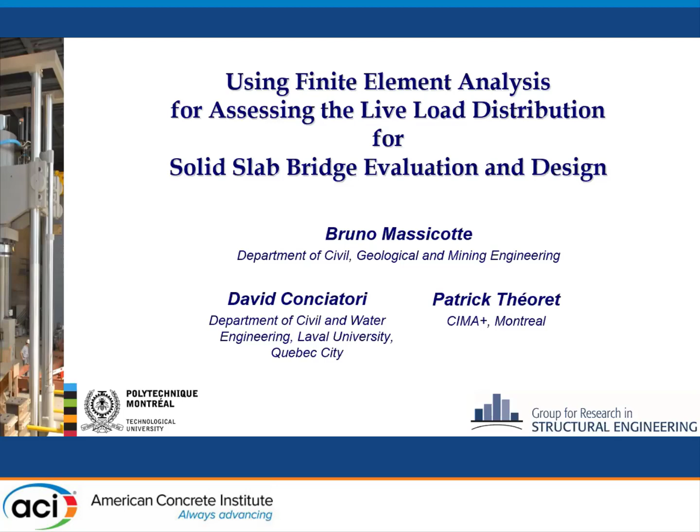The work I'm going to present was done by two people on a project that ended a couple of years ago. They were at Polytechnique at that time, but now they are: a contributing professor at Laval University in Quebec City, and Patrick Théoret, a bridge engineer for a consulting firm in Montreal.

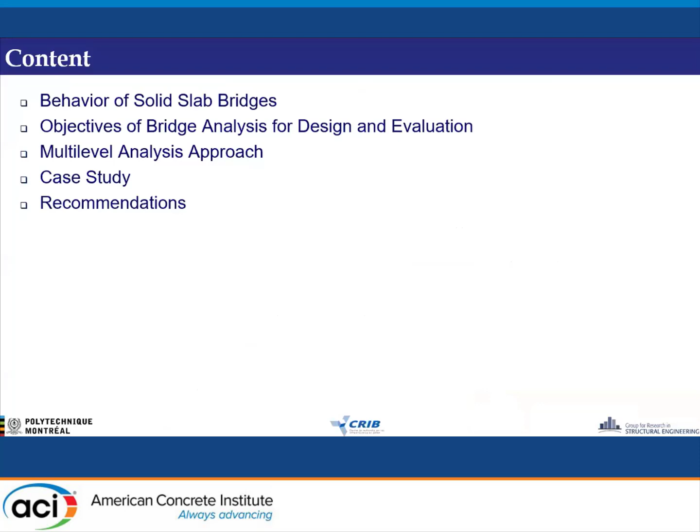So the presentation will talk about the behavior of solid slab bridges and present the objective of bridge analysis for design and evaluation. I will introduce and discuss the multi-level analysis approach, show a case study, and conclude with some recommendations.

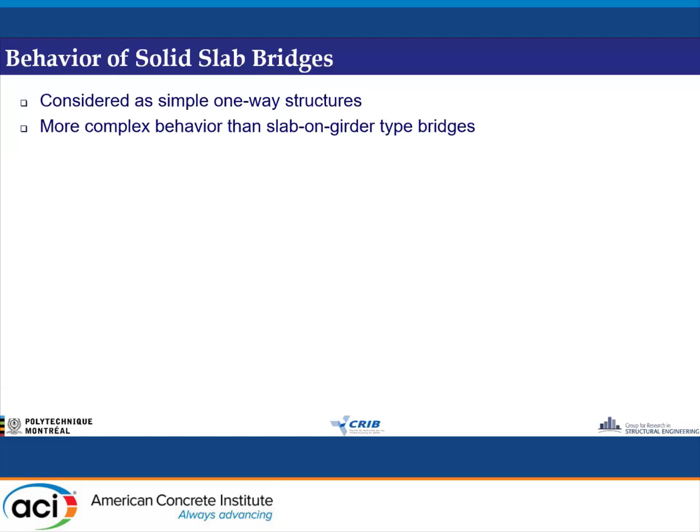Solid slabs are usually considered very simple structures for design and evaluation, and it seems that since the structure looks simple, its behavior should be as simple. Actually, it's more complex than, for example, slab on girder bridges. When I say slab bridges, although everything I'm going to present will be on slabs supported on bearings, the conclusions also apply to slab type frame structures.

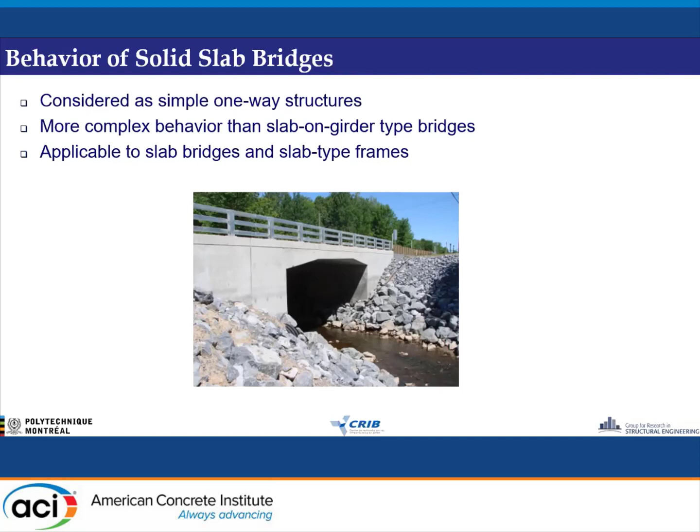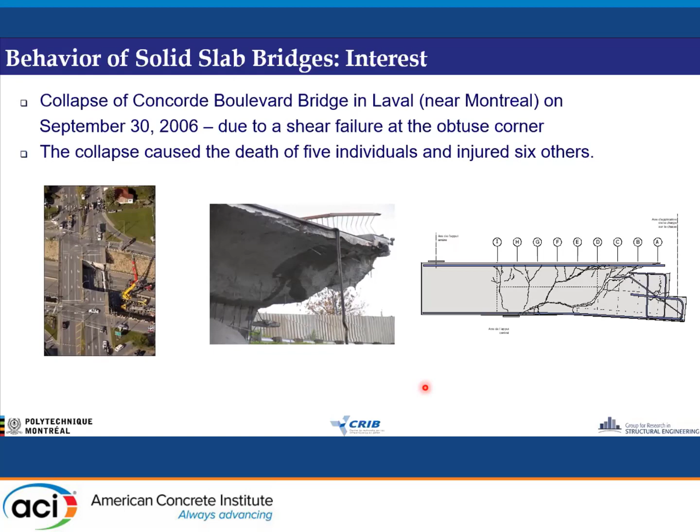An example is shown here. My interest actually came following the collapse of a bridge near Montreal 15 years ago, due to shear failure at the obtuse corner, originating at this point shown in the picture. That collapse caused the death of 5 people and injured 6 others.

Following that, I was in charge for the Quebec Ministry of Transports of finding the causes of that collapse. Since many of those bridges are on the road network, we had several research projects, some experimental, others analytical, on the behavior of solid slab bridges, and 4 of those were tested to collapse with the objective of having a shear failure.

Although it's not part of this presentation, I would say that slab type bridges are quite redundant structures at ultimate.

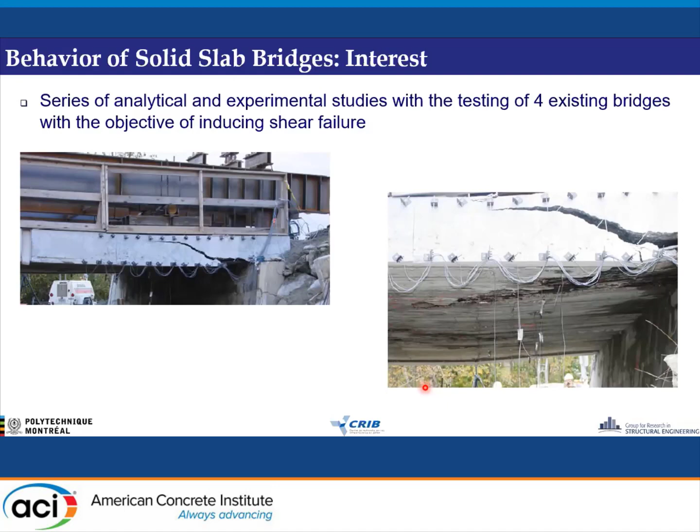Nevertheless, why am I saying the behavior is complex? If we look at this very simple slab type bridge, 12 meters wide, 10 meters in span, and half a meter deep section.

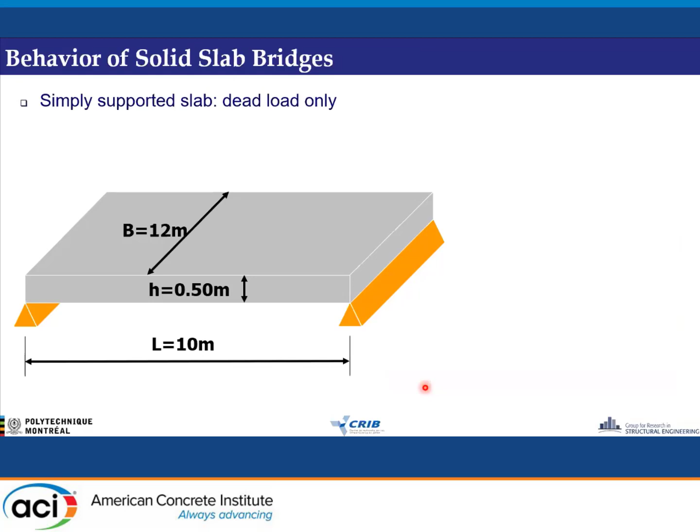If we look at the dead load only, we see there is a non-uniform support reaction. Although sometimes we assume a uniform support reaction for dead load, actually there are some corner effects, and these corner effects are real.

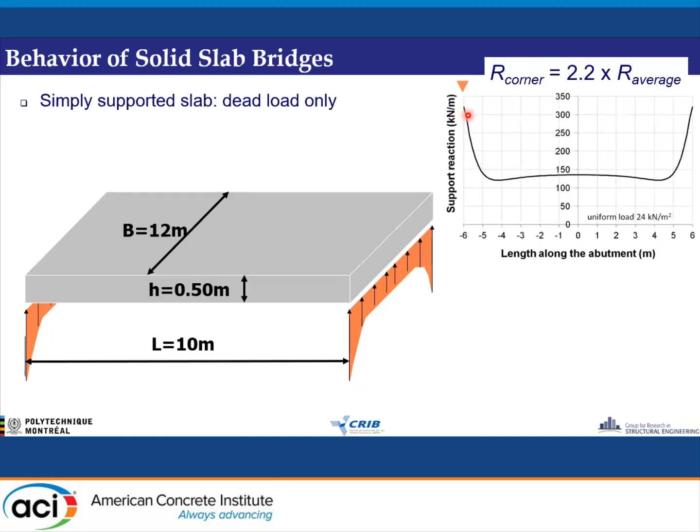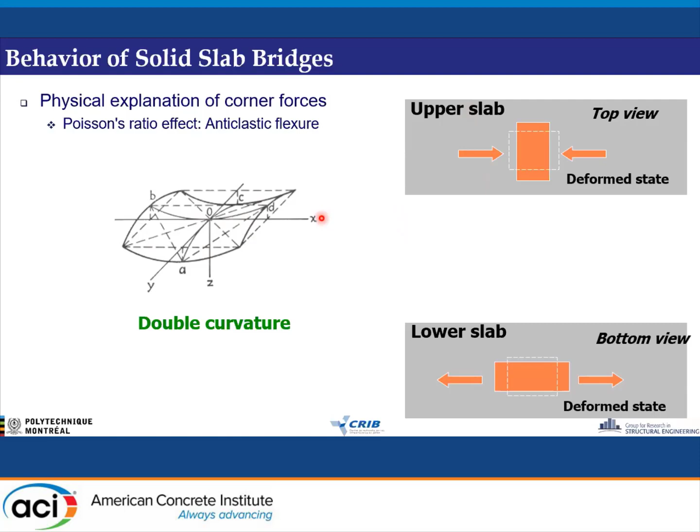Very often it's neglected, and the cause of this corner effect is due to what is called anticlastic flexure, or double curvature in the bridge deck, which tends to load the curvature in the other direction due to the Poisson's ratio, increasing the load near the corners.

That was for a straight bridge. If I have a skewed geometry, say a 30 degree skewed bridge, the effect is much higher. You get a peak load at the obtuse corner here.

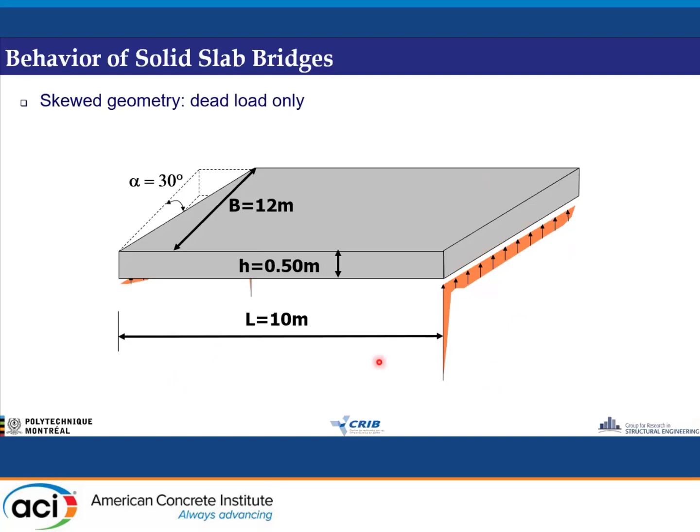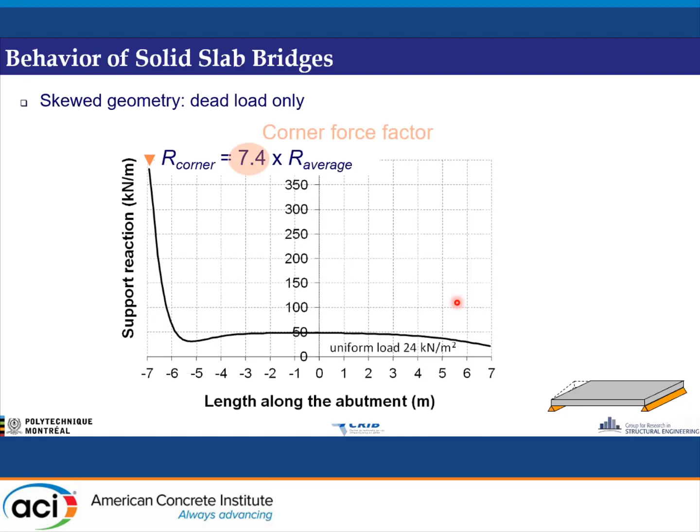If we look at the magnitude of that, for the 30 degree skew bridge shown here, there's a magnification of more than 7 times the average shear effect, and that's only under dead load.

So how can we show that? Actually, there are 2 effects: the Poisson's ratio effect, due to the anticlastic or double curvature mentioned before, which for a zero degree skew angle can double the reaction. However, due to the skew angle, there's a magnification that can go to a very high value—for example, at 45 degrees, the value can go around 10 times the average.

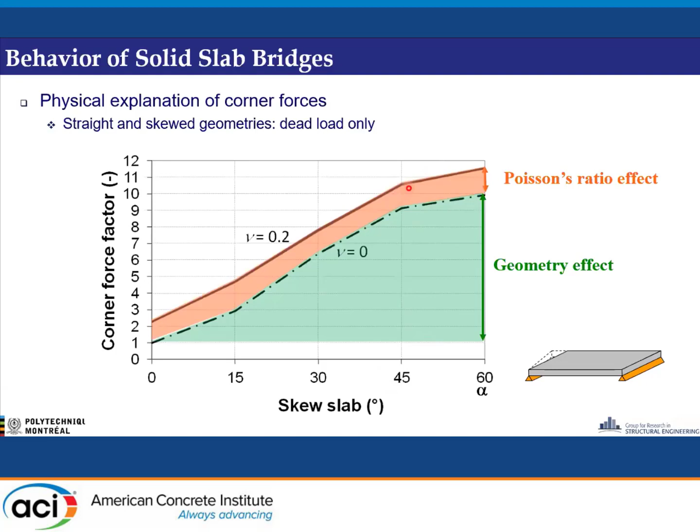The corner effect can be up to 10 times the average value.

And it was, in fact, measured. This is a test done in 1987, so more than 30 years ago, by Morrison and Weisch. In their test, they had a 45 degree skew angle, and they measured the reaction here. We can see that in service condition, shown in red, it's at the obtuse corner.

The ratio is about 10, just a rough value. This increase in shear near the obtuse corner lasts until we get nonlinear behavior, whereas the reaction at this point stops increasing, and the reaction on the other side and across the width starts to increase as well.

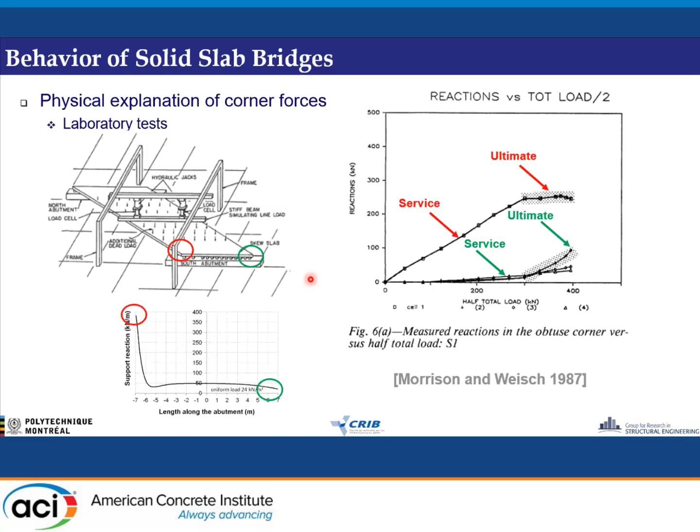So it was really measured experimentally, and it's not just due to the model. Some people say, 'Oh, it's a problem in the modeling.'

No, it's real. So if we're talking about live load distribution in bridge analysis, there are several types of concerns for bridge design and bridge evaluation. In the past, safety was the main issue, cost was second, and service condition came third. Nowadays, safety, service, and cost are usually the new trend in bridge construction and rehabilitation.

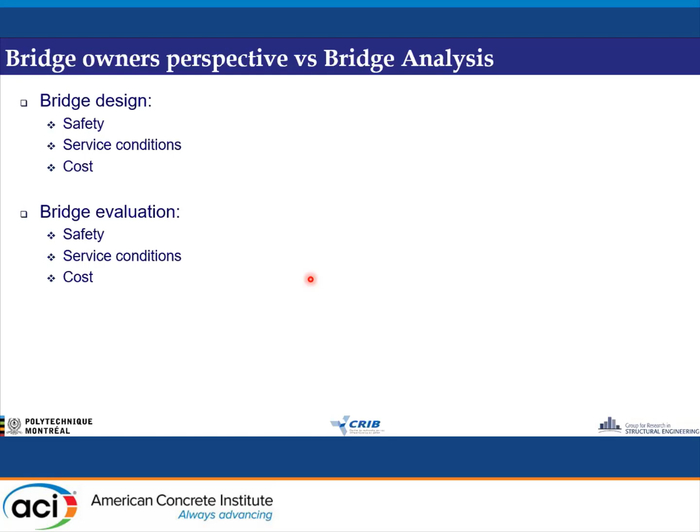So if we do bridge design, safety is usually well covered by code, and we make sure the section remains ductile. Service conditions are usually taken care of by selecting adequate materials and appropriate details like reinforcement cover and whatever is needed to increase service condition.

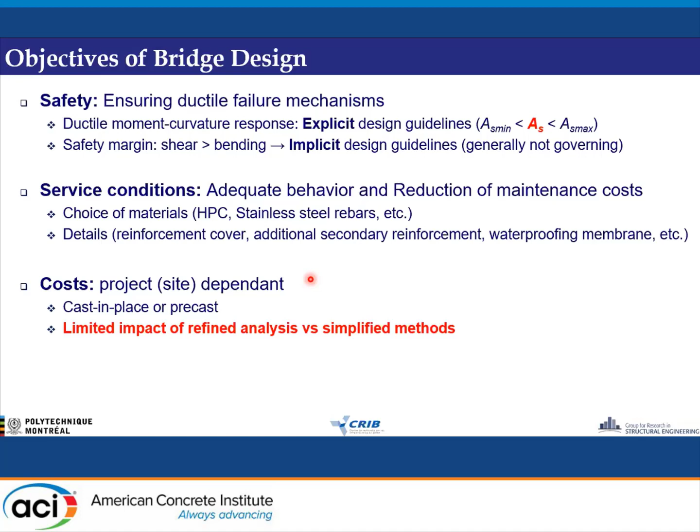And cost, assuming the bridge type and location have been selected, gives you the choice of whether to use cast-in-place or precast construction. So at the end, there's a limited impact of refined analysis versus simplified methods in the design of new bridges. For bridge evaluation, safety is a different issue.

It's been discussed lengthily today by other presenters, so you have to identify all potential failure mechanisms. You have to quantify the level of redundancy, determine the actual material strength, determine the realistic dead and live load effects, and the service conditions are helping.

Actually, what you see is what you get. So what you see helps you understand the structure's behavior - does it behave as predicted by the models or not?

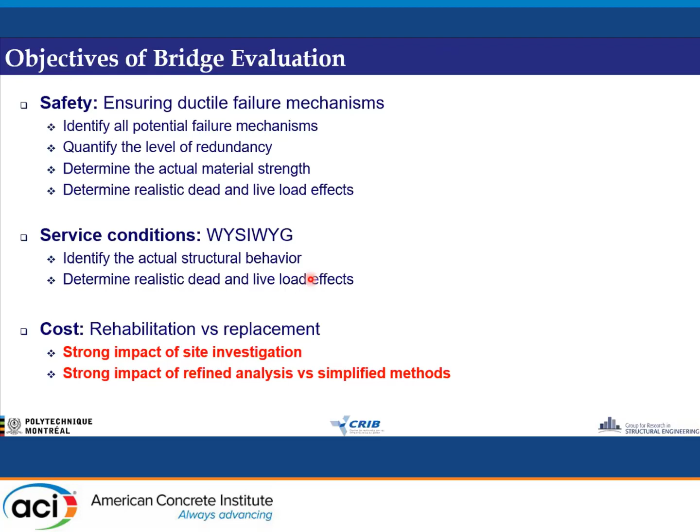And the cost is mostly related to whether we should rehabilitate or replace the bridge. So a strong impact on cost comes from whatever you get from site investigation and the type of analysis you carry out, so that you can capture the real behavior of the structure.

So there's a learning process, and if you take the University of Toronto engineering principle, it's kind of a joke from University of Toronto in structural engineering. There are three rules: F equals ma, you can't push on a rope, and you have to find an answer - you must know the answer. So that's kind of a tricky condition.

So in analysis, for design, we usually adopt linear elastic properties, and it's the same for most evaluation cases - linear elastic properties are usually sufficient. However, in some evaluation cases, you may go to nonlinear material properties.

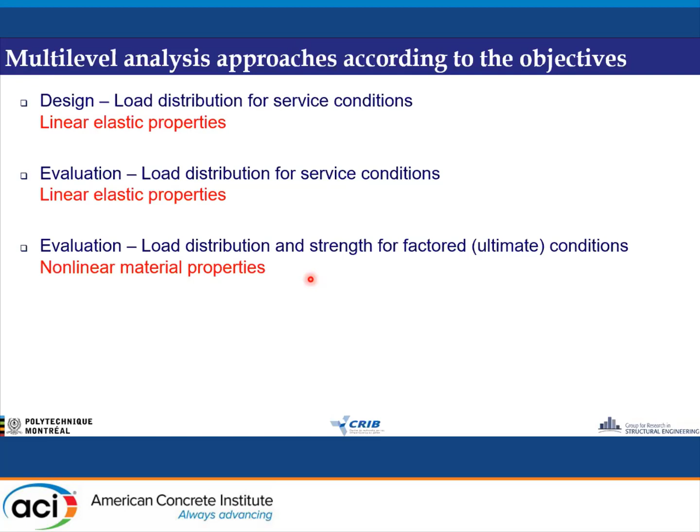So what is the link between that and the University of Toronto principle? To find an answer, you must first know the answer. That's kind of an impossible way to do it - there's no way to solve that.

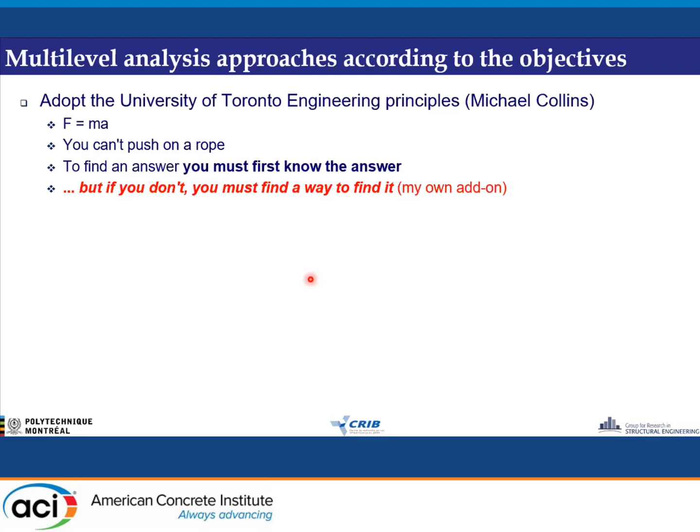But I may add, this is my own creation: if you don't know the answer, then you must find a way to find it. This is what I'm teaching my students - you have to go from the simplest model possible, like simple static, simplified methods using the beam analogy method, and in design you always have to start with this.

What I know from young engineers is usually they want to jump on the computer, they want to do a 3D model, they use whatever software is available, and for them this is reality. So I think this is very important, even in design.

Whatever sophisticated software is available, it's always important to start with a simplified method. In our bridge code, it's highly recommended. Then you can also use grillage analysis and often go to finite element analysis, for example using plate analysis.

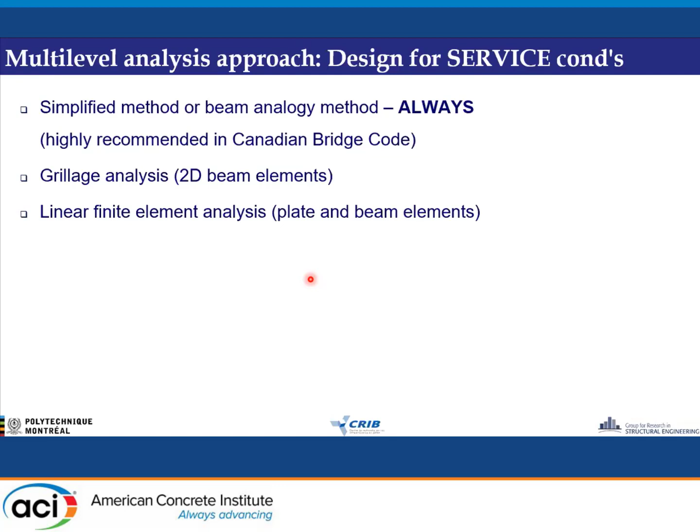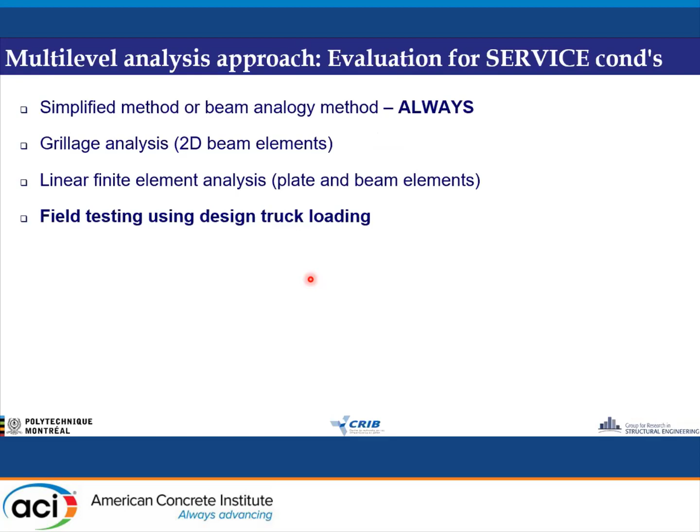We're talking here about slab type bridges. When you do bridge evaluation, you would proceed with the same three levels, and sometimes you may go even further to do some field testing so that you have a better understanding of your structure's behavior.

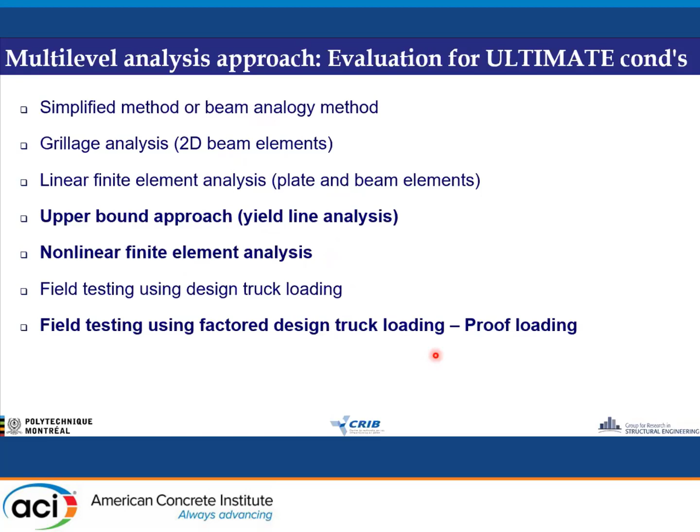You can go even further in bridge evaluation using nonlinear methods such as yield line analysis, which is an upper bound analysis. You may also use nonlinear finite element analysis, and usually all these steps are sufficient to do a good bridge evaluation. You may also go to load testing, which is always expensive, and at the end, if needed, to proof loading, as some jurisdictions do once in a while. So these are some approaches that can be adapted.

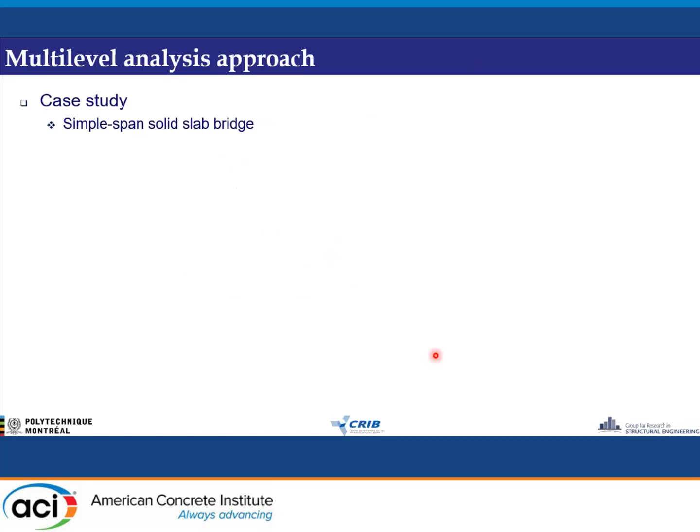I'm going to illustrate the behavior of slab type bridges using a simple span solid slab bridge example. The work I'm presenting here was published about 10 years ago with the two co-authors of this presentation. It's mostly based on a 10-meter long structure, a 3-lane structure, so it's 12 meters wide and half a meter deep.

We have two types of loading, a uniform load for dead load, and the truck. We're using different types of linear finite element models: grillage, plate element, and solid 3D. When I say grillage, there's an orthogonal grillage, which is often recommended, but you'll see in the conclusion it's a very bad model.

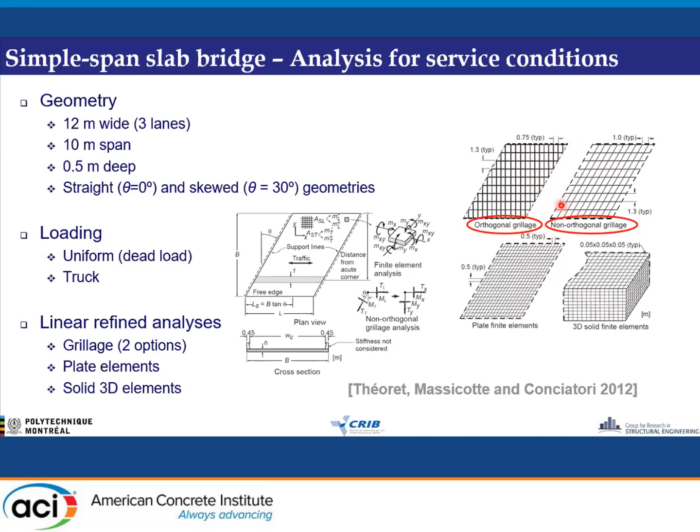And the best grillage model is one in which, if you have a skewed geometry with traffic from left to right, your transverse element will be parallel to the structure support. This is the most optimal way to do a grillage, as I will show you later on.

Let's look at the uniform load for bending moment. This is for a straight geometry, and here for a skewed geometry with 30 degrees. Let's focus on this one. If you only use a plate element to compute your bending moment, you won't get the right answer. You have to add, as required in the ACI code and most design codes, the flexural bending moment and the torsional bending moment at each point to get the real bending moment.

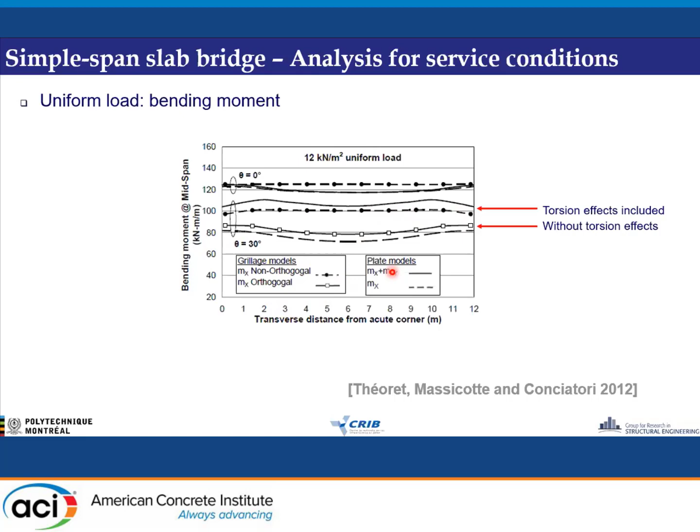That's what we get here - the real bending moment shown by the line with the black points. The dashed line here is what I call the non-orthogonal grillage model, and we got the same answer using a plate element and a solid element. Now if we look at the reaction, still with the uniform load.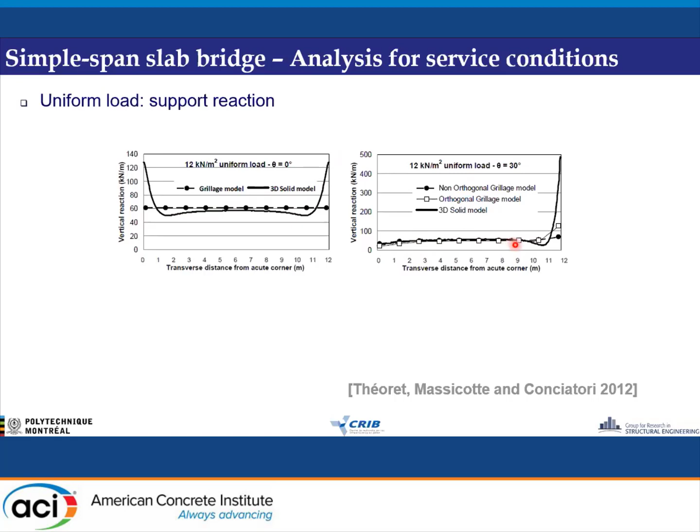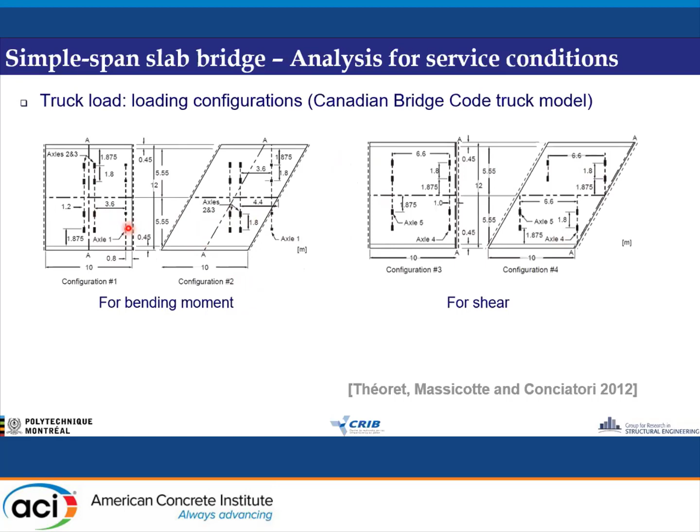So the grillage model is very good for shear across the width, except near the obtuse corner. With different truck loading, two cases are more for bending moment and the two others are more for shear. Again, looking at bending moment with the plate element, if I add Mx plus Mxy, the non-orthogonal grillage model catches that very well. So it's a good approach.

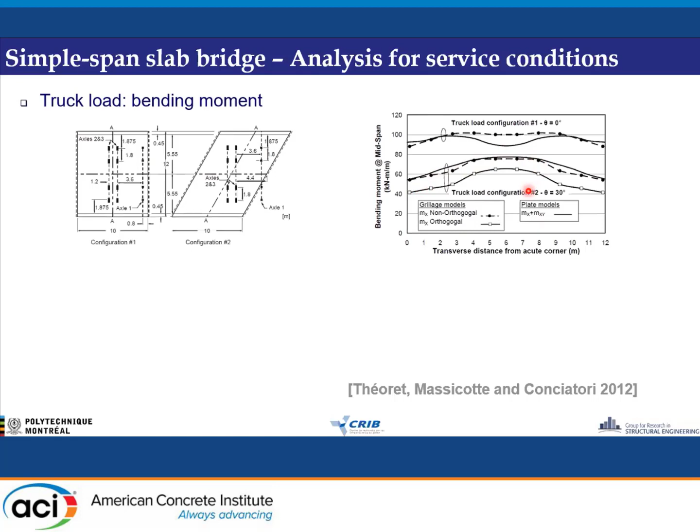Now looking at the same two loading cases, but for shear across the width - if I have a straight configuration, the grillage model is quite good. However, if I have a skewed bridge, the grillage model is not very good at catching this magnification factor on the side.

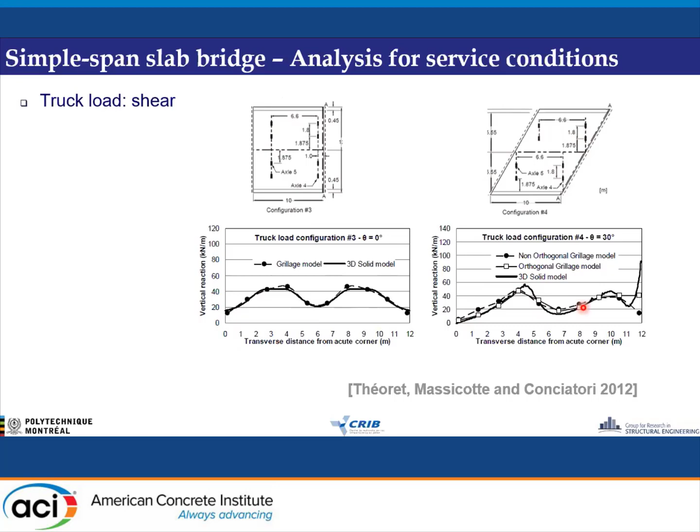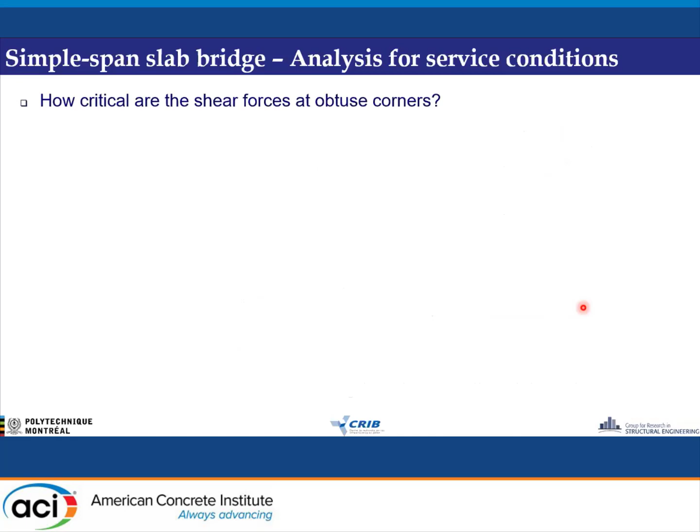I'm doing the same here with two loading conditions for the straight bridge and skewed bridge, comparing the grillage model to the solid model. Again, it's very good - the non-orthogonal grillage model catches the load distribution across the width, except near the obtuse corner. So how critical is the shear force at the obtuse corner?

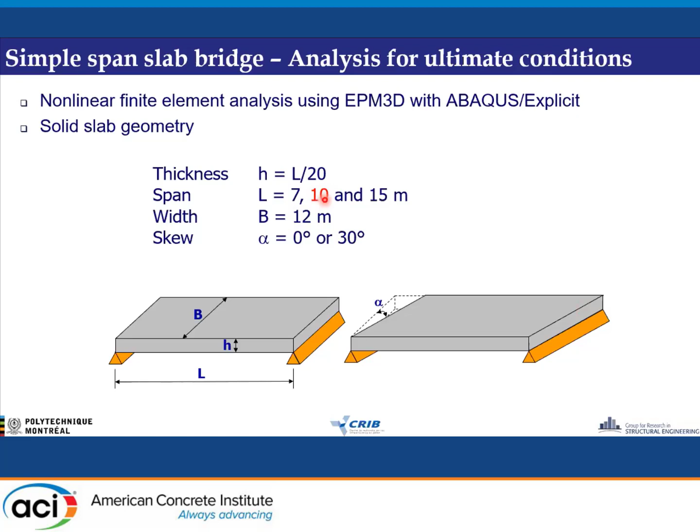Is it because we don't want to do a very, very refined analysis all the time? So I'm going to show you some nonlinear analysis that was done, focusing on the same bridge we've been looking at so far, the 10-meter long bridge. Here we're seeing nonlinear finite element analysis, and the 10-meter span is this one. We start with the straight geometry.

What we're showing here is the corner force factor. The dead load level is about here, and the factored design load is about here. We can see that this corner effect reduces significantly when cracking occurs in the slab, toward reaching the failure of the bridge, and this one failed in bending.

If instead of applying a uniform force, we apply forces in bands, then this creates a shear failure. We can see here the shear failure in the finite element model, and the corner magnification factor, or corner factor, also reduces - if the failure occurred here, to a value of about 1.2. This means the force concentration, the corner factor, reduces when cracking occurs.

That was for a straight bridge. For a skewed geometry, this is 30 degrees with a uniform load, and 30 degrees with the corner with two bands. Again, we're coming close to a value of 2 at ultimate for shear with uniform load. For shear with the band, we're closer to a value around 1.5.

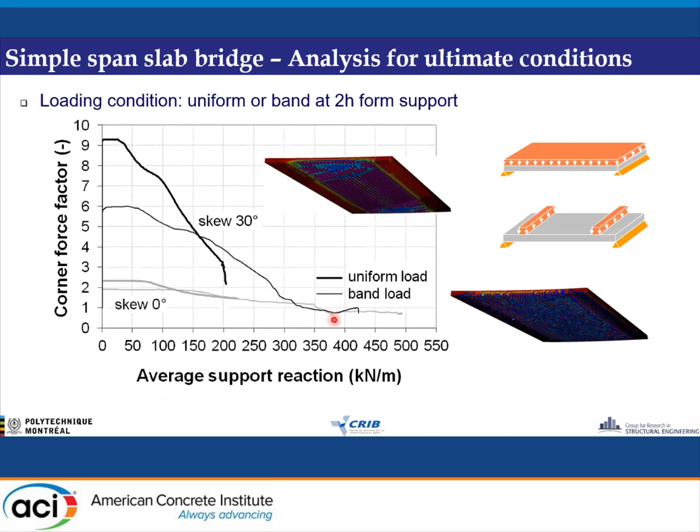So as a conclusion, the recommendation for design would be that the analysis for dead and live loads should use two levels: one using a simple beam analogy or grillage method. You can use either of these, but as I mentioned before, the grillage is very good for shear and bending moment, except for the shear concentration effect near the obtuse corner.

In the Canadian code we have two equations, one for simply supported conditions, one for continuous supported conditions. The effect is smaller when you have continuous support. This factor increases shear forces at the obtuse corner, and the value you'd get with this equation would be close to what we get here.

We observe this in nonlinear modeling, consistent with Morrison's and Wesch's test series, and this should be enough for most cases.

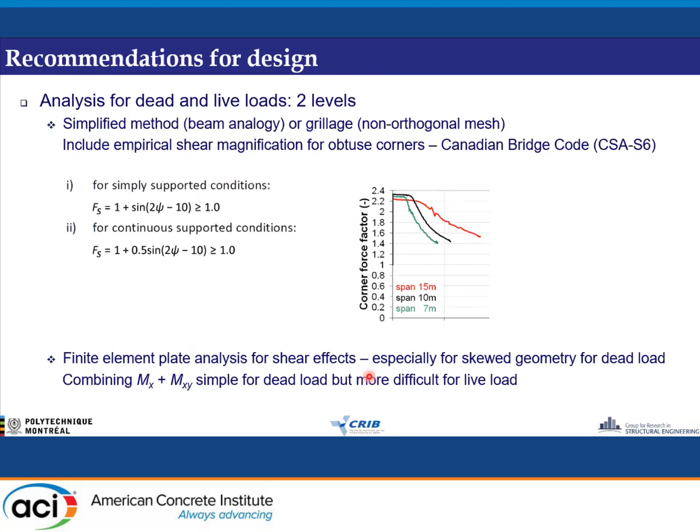If you have a structure where for design you're a bit uncomfortable with the shear stresses, then you may use a plate model, a finite element plate model, just for the shear. For the combination of bending moment it gets complicated because you have to add the flexural and torsional effects at the same time, so grillage is enough for that. However, for shear it may be helpful, recommended, to use plate analysis to get a better shear effect.

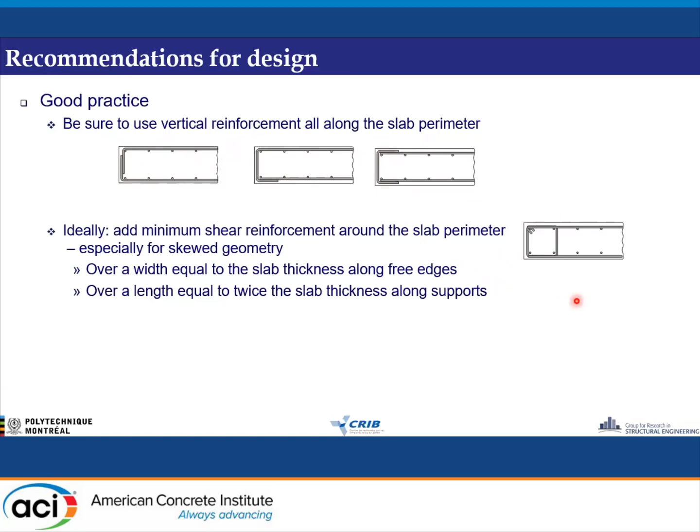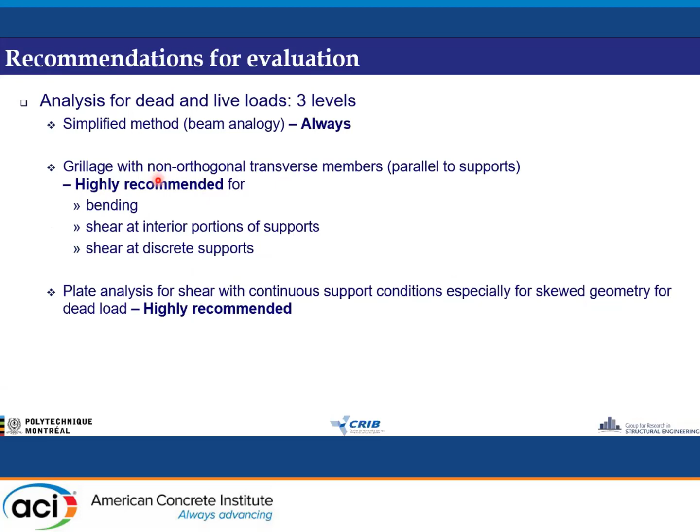And my last slide here - for evaluation, I would say three levels could be used. For bending, shear, and shear at discrete support, then you can use a grillage model, and it's also highly recommended to use plate analysis.

Thank you for your attention, and I'm open for questions.

Thank you, Bruno. Very interesting topic.